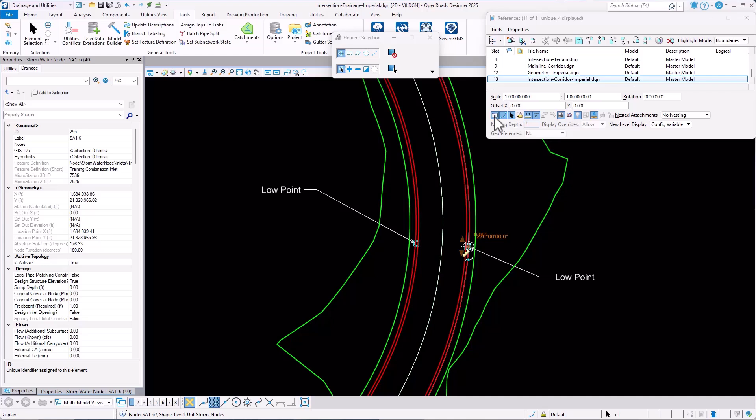I've got two inlets placed at the low point in my roadway here. I'll just turn off the referenced design file for the roadway. I've selected one of the inlets, and if we look at the drainage properties, we can see that the inlet location is set to in SAG. I've also got two gutters connected to this inlet approaching from the two sides.

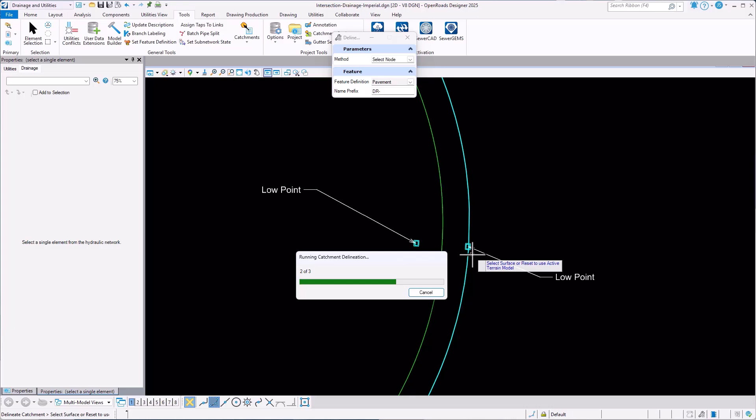If I run catchment delineation, I'll select the inlet and then reset because I've got an active terrain. Because we've got two gutters approaching this SAG inlet, we now delineate two catchments to that SAG inlet instead of one. So if I pick one of those catchment areas, we can see that it's connected to the gutter and not connected to the SAG inlet.

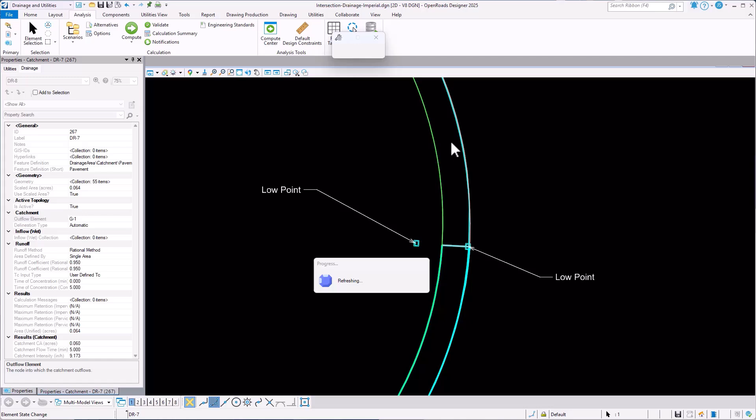And because these catchments are connected to the relevant gutters, when we compute the system, we'll get accurate approach flows from both sides of the inlet. And if we select one of those gutter polygons, we can see the spreads develop as we move towards that SAG inlet.

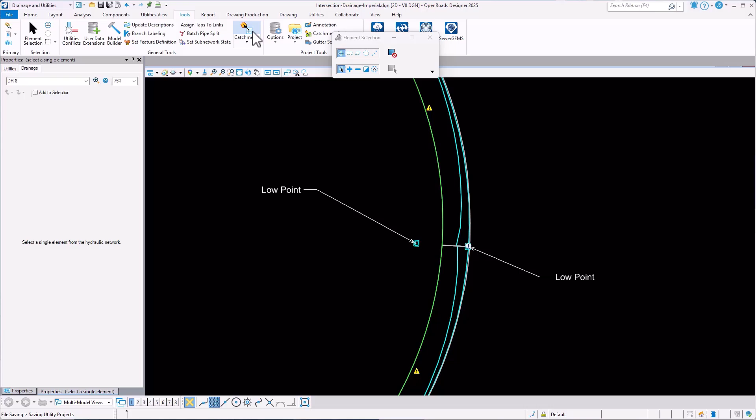If I delineate the catchment to the inlet on the other side of the roadway, because it doesn't have two approach gutters, we get the one catchment area on both sides of the inlet. However, if I now locate two gutters feeding into that SAG inlet, so there's one, and we'll just do the other one,

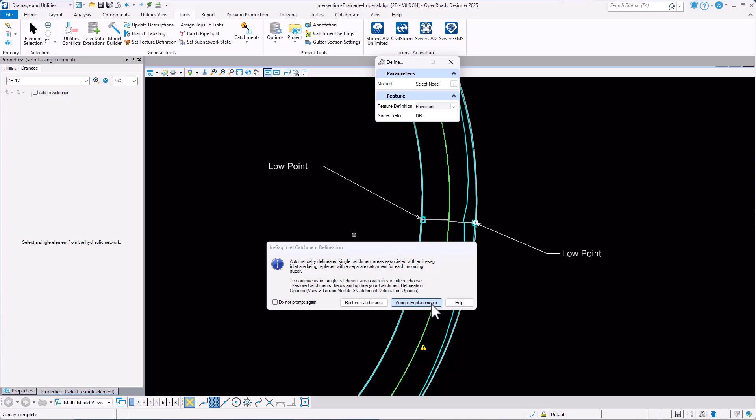then I can update that catchment by running the delineation option again. We'll select the node, and the fact that the inlet now has two approach gutters is detected, and we're offered the choice of replacing the single catchment area with two catchment areas, one on either side of the SAG inlet.